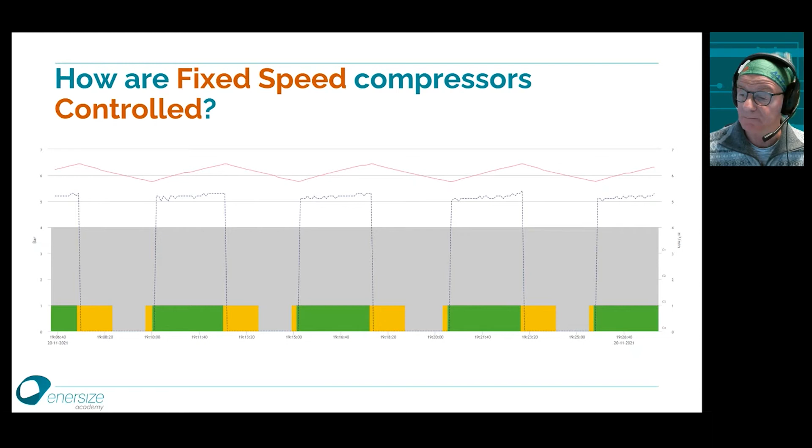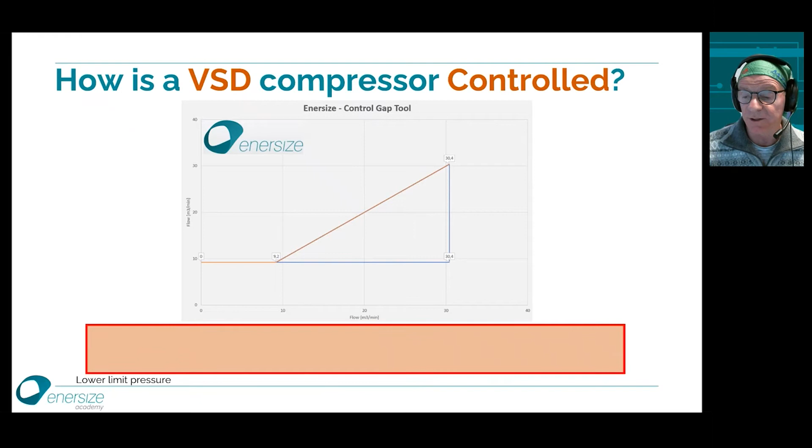That was fixed speed compressors. With the variable speed drive, VSD compressors, it is a little bit different, not much, but a little bit. We still have the lower limit pressure, or the load pressure, and then the unload or the upper limit pressure, and then we have something we call target pressure.

And as long as we are in the VSD mode, and VSD mode means for a VSD compressor typically from 100 and down to 30%, then it will try to stay on the target pressure and speed up and down according to the demand. When it reaches the 30%, then it will start to operate as an on-off compressor. And that is basically what creates the control gap problem or issue.

But that's the way it is with VSD compressors.

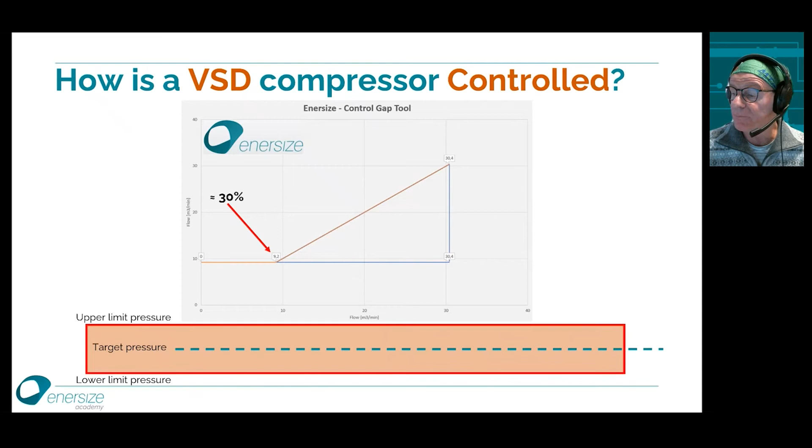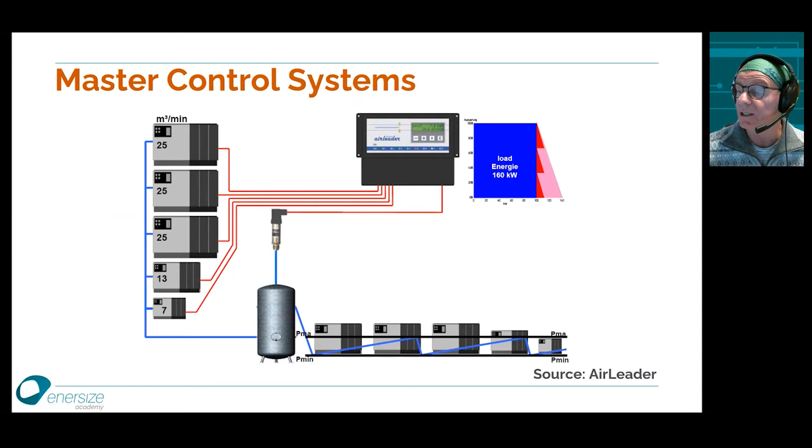But the master control will try to stay on the target. Now again, we are back in our X-Air cloud system. As you remember, red line bar, dotted line flow, green means running, yellow means unloaded, and gray means stopped.

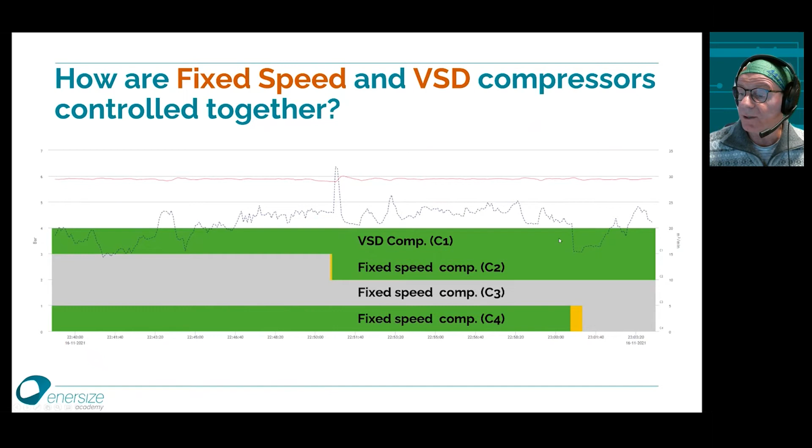You can see on top we have the VSD compressor. Remember, the VSD should preferably be always the first one in and the last compressor out, and this is also what happened here. We are running this VSD together with 3 fixed speed compressors on top of everything. The VSD will speed up and down according to the demand, and then we call in or send out fixed speed capacity accordingly.

So this is pretty much the way it should work, as shown here. Thank you.

Yeah, my topic for today is control gap when compressors fight. And I see this problem a lot. These days, variable speed drive compressors are quite popular, and they require some different settings and different sizing rules so that they work properly.

So in order to be efficient, VSD regulation over the complete range of compressors profile must be continuous, and the VSD should be operating nicely between its minimum and maximum settings. And if that's happening, then you'll have a really nice system that's efficient from 0 to 100% capacity, 100% capacity being the total combined capacity of your compressors.

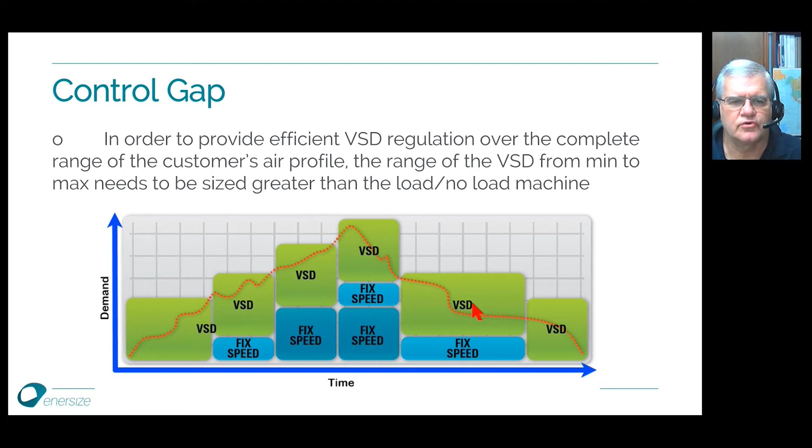And to achieve that, you need a little bit different compressor settings from what is normally seen in a multi-compressor system.

Now, a control gap happens when the variable speed drive compressor is not sized properly compared to fixed speed compressors. So the rule is that the variable part of the variable speed drive compressor must be equal to or larger than the fixed speed compressor with which the VSD must work.

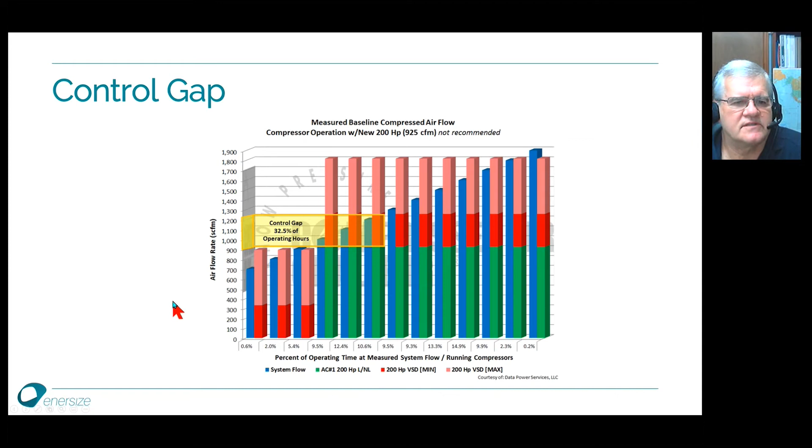Within these flows, here, here, and here we've got control gap issues. The rest of the time, the system is operating nicely, because the control gaps are actually in a band. Below the control gap, everything works nicely, and above the control gap, everything works nicely. If we had a third compressor come on, we would also have a control gap up here of the same width. So that's kind of my explanation of a control gap.

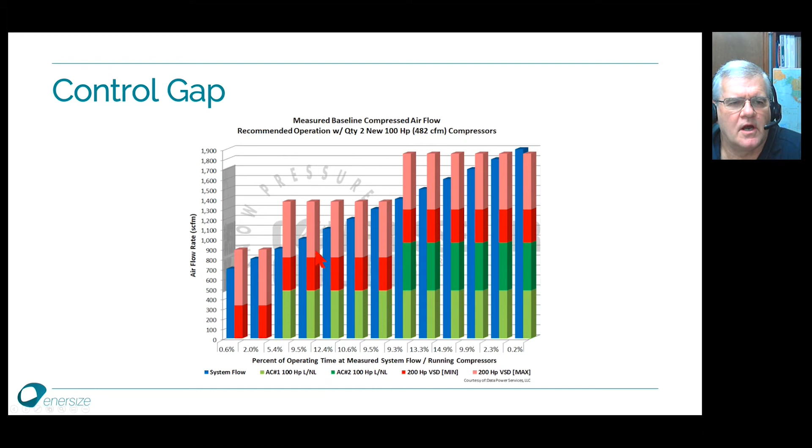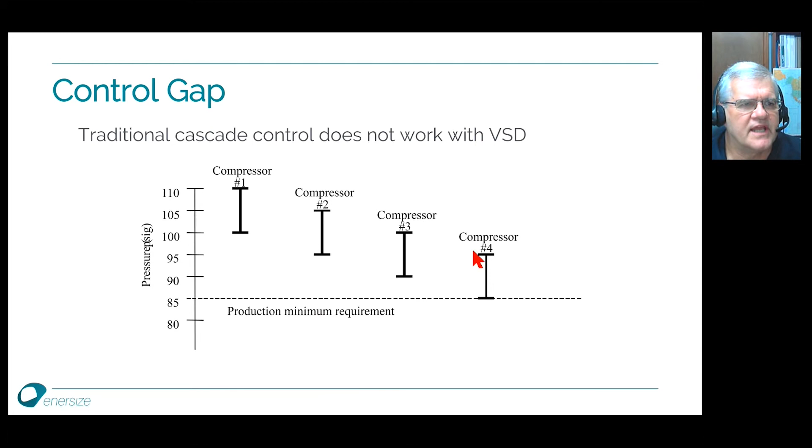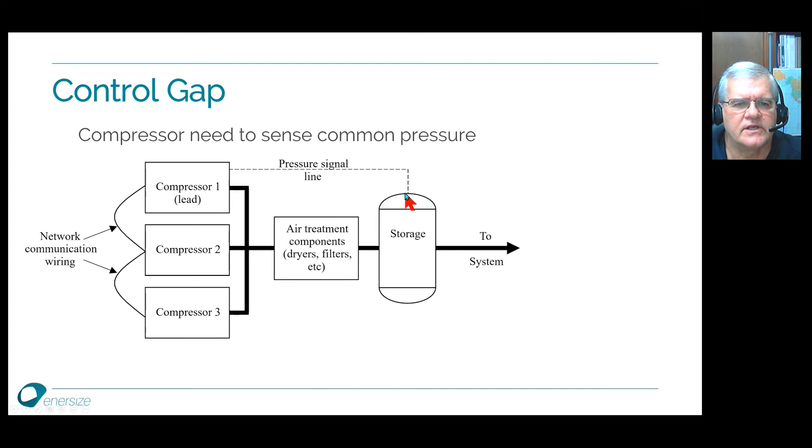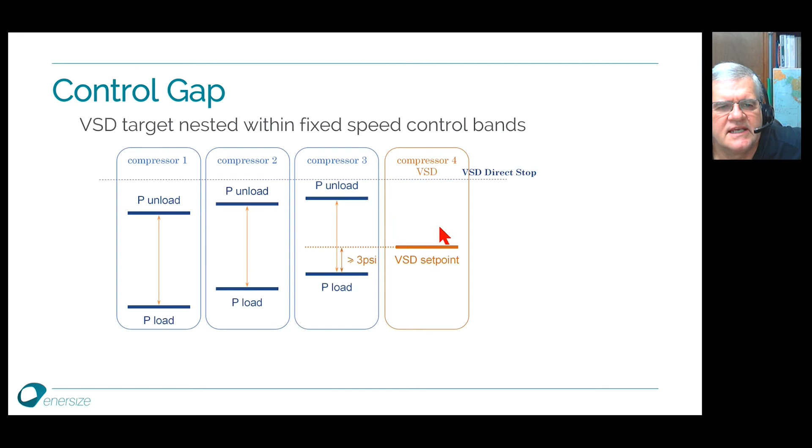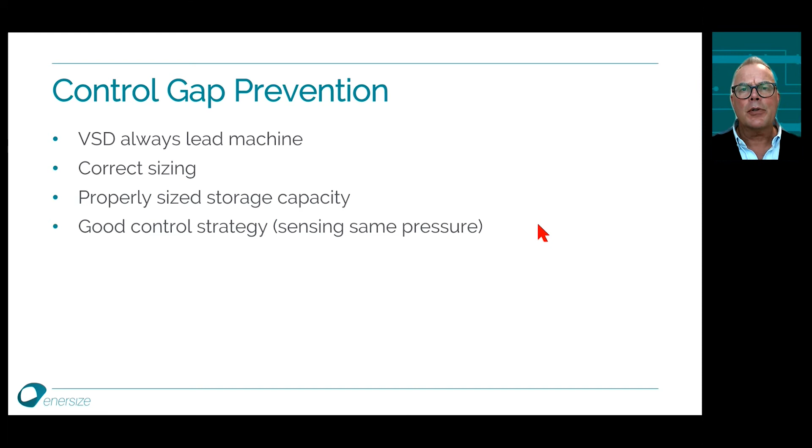Well, thank you very much, Ron, and we will continue to speak about compressors and about what happens when compressors fight. So it's great to have you here, Bo, and I'm looking forward to hear what you are presenting today. Screen is yours.

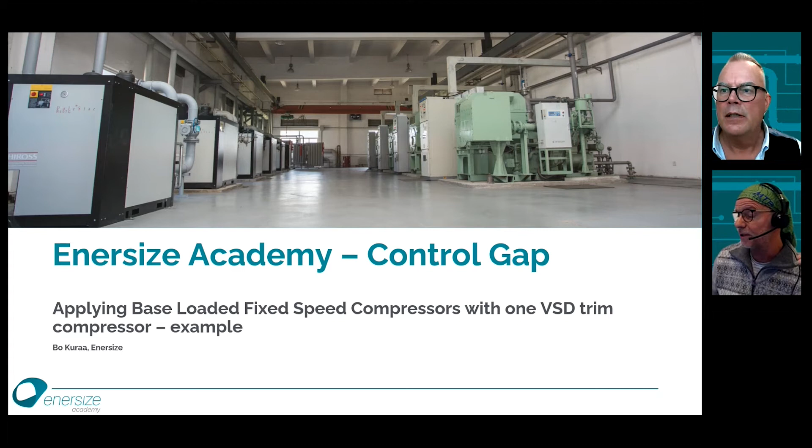Okay, thank you, Anders. I will talk a little bit about the control gap problematic or issues you can have. Let's take a look a little bit deeper into what it is.

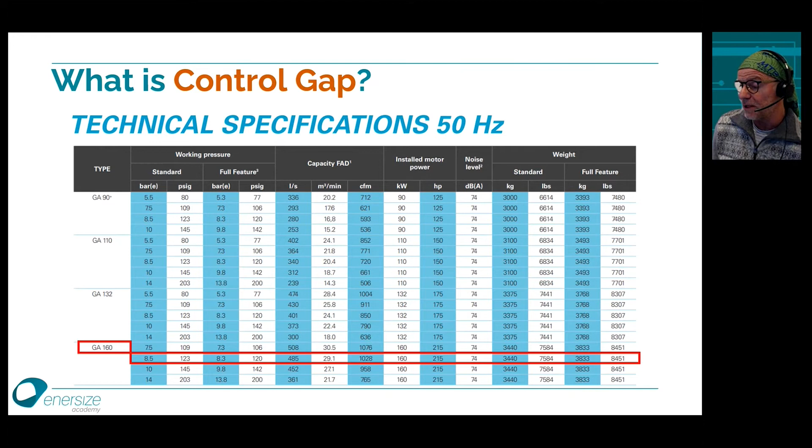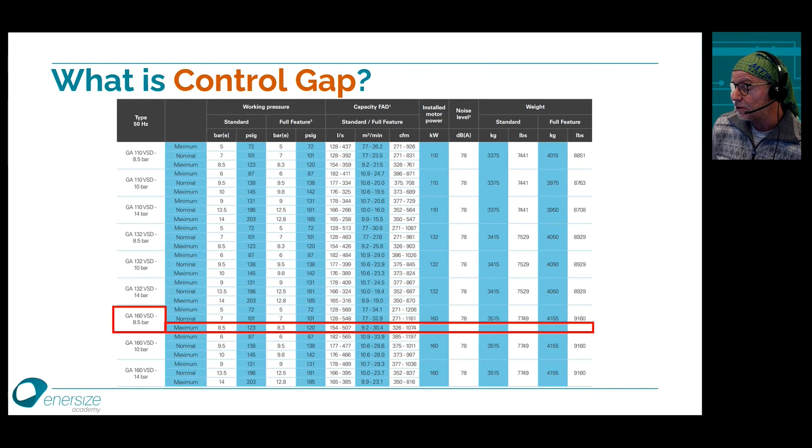If you take, for example, Atlas Copco, the GA oil-injected 160 kilowatt compressor, we go for an 8.5 bar machine. Then you will see that this one fixed speed compressor can deliver 29.1 meter cube per minute. We go into the similar data for GA 160 VSD. We have it here again, 8.5 bar. And if we look into this capacity according to free air delivery, FAD, then this compressor can go minimum 9.2 and up to 30.4.

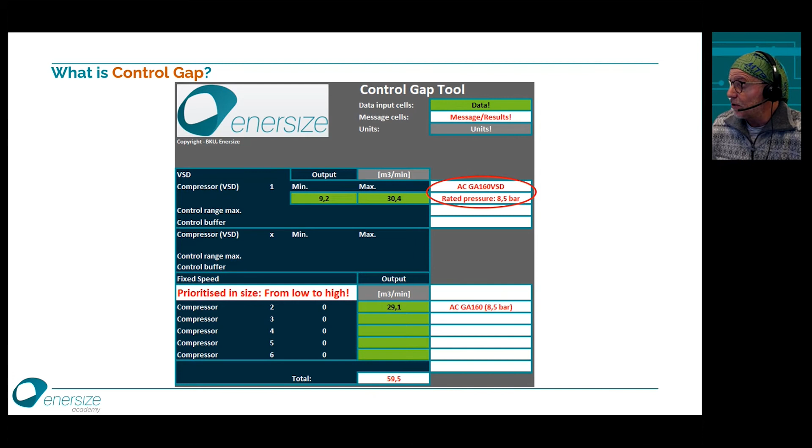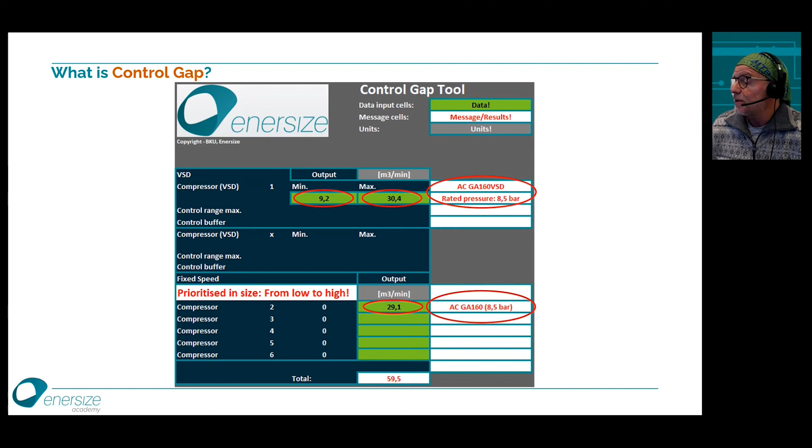If we try to put these numbers into our developed control gap tool, you can see I put the minimum output from the VSD at the top. We are again dealing with an Atlas Copco GA160 VSD. I put the 9.2 minimum and the maximum was 30.4, as you remember from the manual or the brochure. Then we have the other one, an ordinary oil-injected fixed-speed compressor, same size, or almost the same capacity, 29.1.

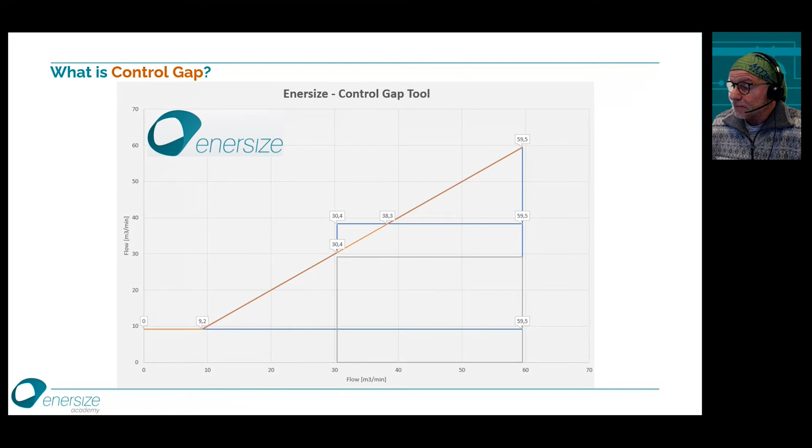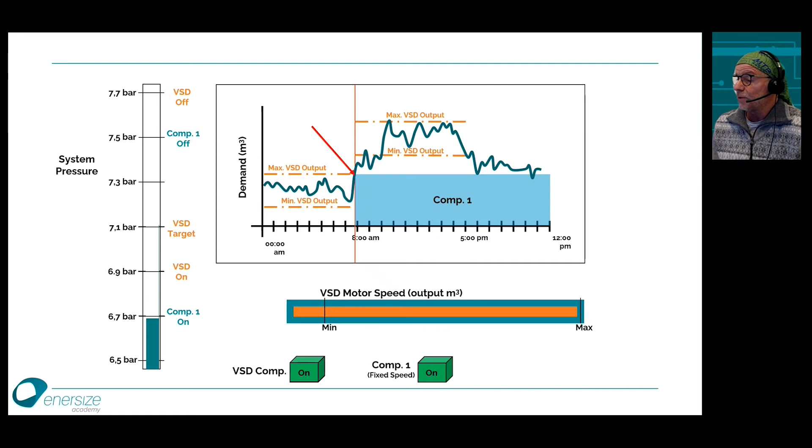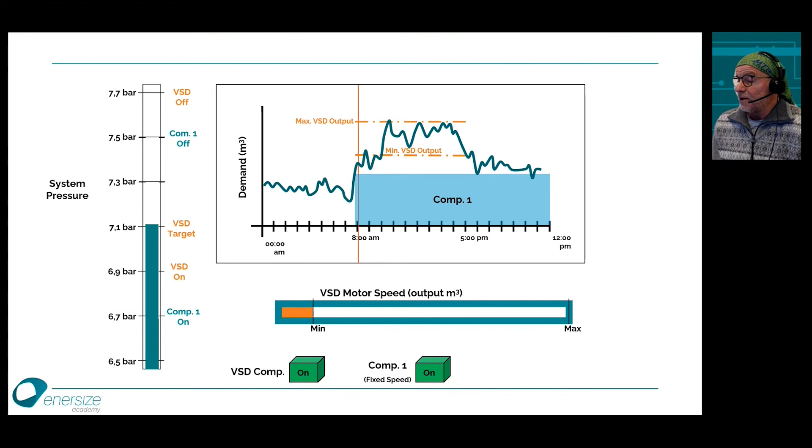You see the fixed speed compressor will go on, or actually first the VSD motor will go full speed trying to handle the situation, which is not enough. Compressor 1, similar size, will go on. And now, as you can see, we have too much air available, which will cause the pressure to increase.

You can see up to where we put the fixed speed compressor into unloaded condition. We are here at the minimum speed for the VSD. Next, we are in this area, as you can see, the control gap area, as we call it.

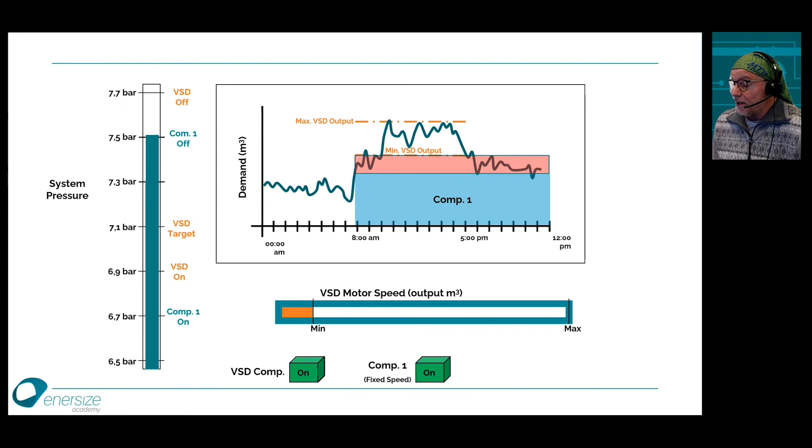The next thing that will happen is that compressor 1 will go off, or unloaded. And remember, unloaded means the fixed speed compressor will still continue to consume in the region of 25% energy, even though it doesn't contribute at all to the generation of compressed air.

We are now in a situation where we have the VSD minimum speed. The VSD is now all by itself again. It will try to speed up, but shortly after, compressor 1 will have to go on again because we simply have too little air available.

So that will happen next. We have seen that before. It goes on, we go on at the VSD target, and we are again at too high pressure. That will continue basically forever as long as we are in the control gap area. That was not the intention when you bought a VSD compressor in combination with a fixed speed compressor, that you will have basically a VSD compressor going on and off.

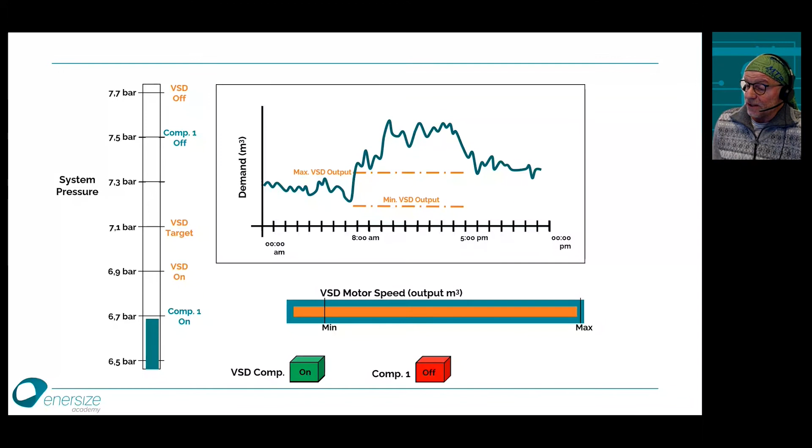Same with the fixed speed compressor. The fixed speed compressor will consume in unloaded condition 25% energy, and you will have a lot of pressure fluctuations. This is control gap in a nutshell. This is what we will get if we buy two similar sized compressors, VSD and fixed speed. And it doesn't really matter if we have more compressors. This was just an example.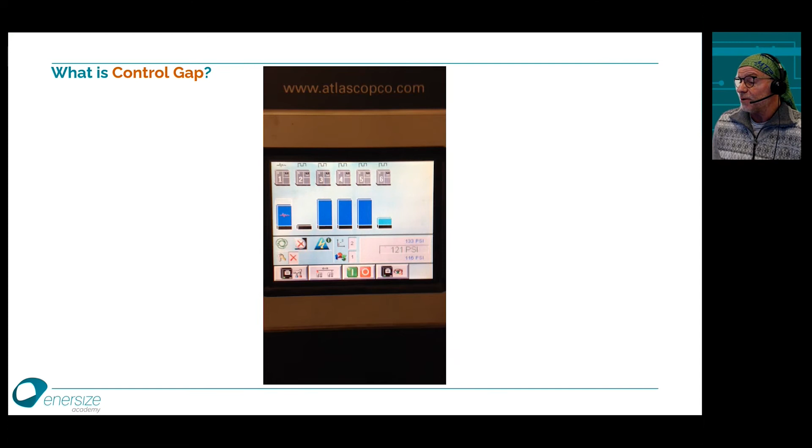Let's take a look at how it will look in real life. I will just show a little video about what it is.

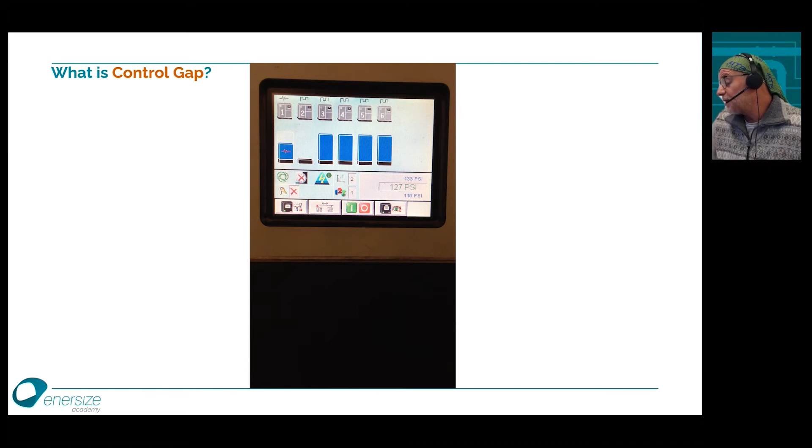As you can see, what you saw here was actually the first compressor was a VSD compressor, and you could see compressor number 6, which is a fixed speed compressor, going up and down from loaded to unloaded mode, and then consuming 25%. You can imagine that a compressor in the size of 400 kilowatt will still consume roughly 100 kilowatt to basically do nothing. Thank you.

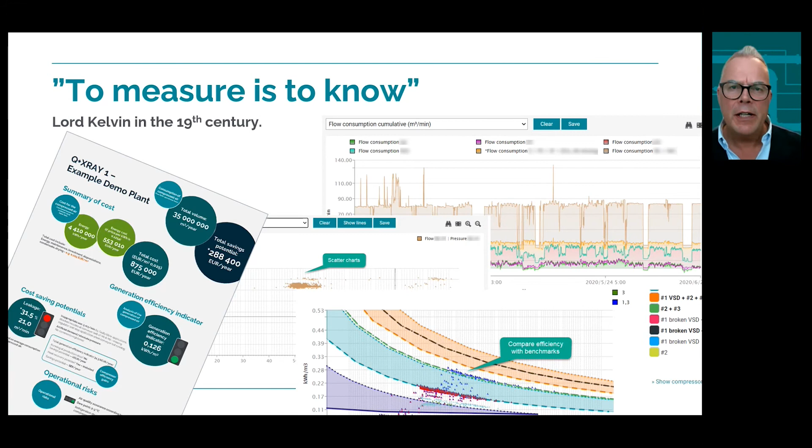Already in the 19th century, Lord Kelvin said, 'To measure is to know.' And this, you can say, is the fundament of everything we do at Enersize. In other words, we believe in data-driven decision making. And when we are helping customers with energy optimization of their compressed air, we always start by creating a baseline with what we call X-ray.

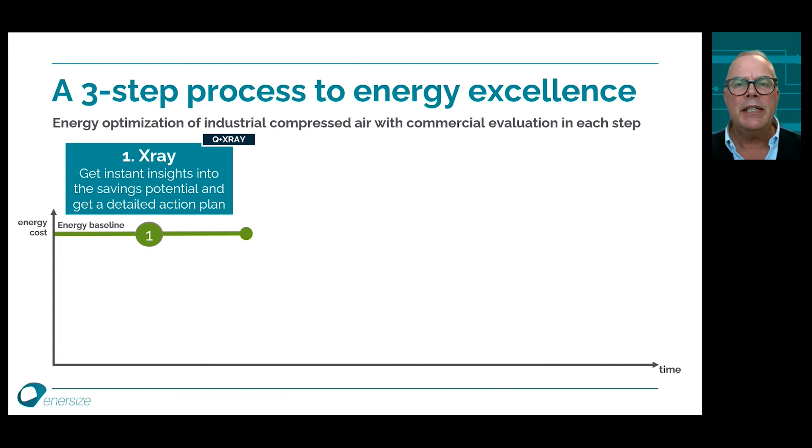We install mobile battery-driven loggers in the plant to measure pressure, current, voltage, dew point, etc. And we upload the data to our cloud database for analysis. With this, we are able, in a scientific way, to establish the initial energy baseline, defining the true energy cost level for running the compressed air system.

We are also able to present the savings potential and a detailed action plan on how to reach that. In the next step, we carry out a leakage survey and a repair project to reduce the waste. When the project is finished, we deliver a confirming system analysis, and once again we utilize the mobile loggers to get the scientific definition of the new energy cost level. We call this service, all in all, leakage reduction.

From this moment, we implement continuous monitoring in the plant to follow the compressed air system in real time, and to take data-driven decisions and help customers institute a sustainable energy optimization of their compressed air system. The ambition is to monitor and maintain the new energy cost level, or to reduce it even further. We call this latter step energy optimization.

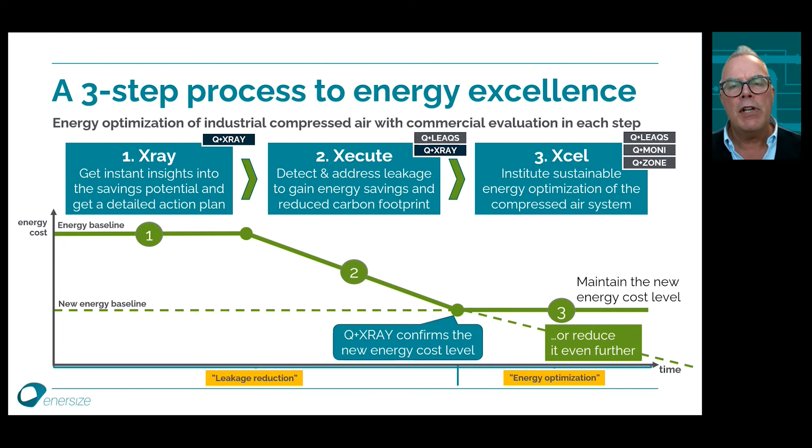And this is, I'm sorry to say, a never-ending story. We know one thing for sure, and that is that leaks will come back and new ones will occur as long as machines and human beings are in motion. The only way to keep a sustainable energy optimization and stay in control is to monitor and continuously act on deviations from the set target levels.

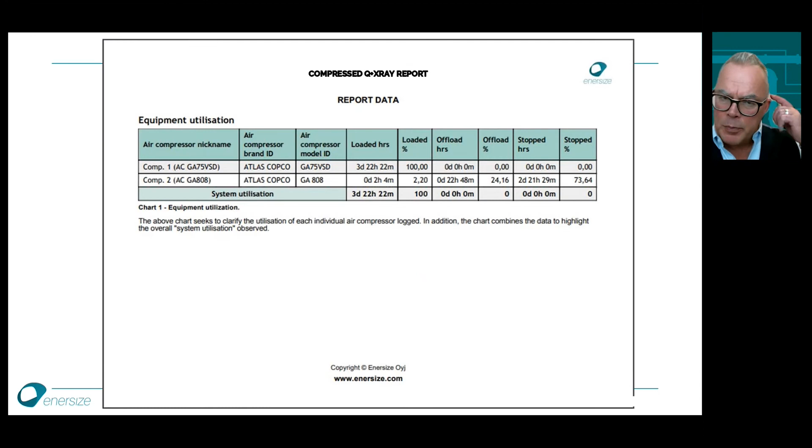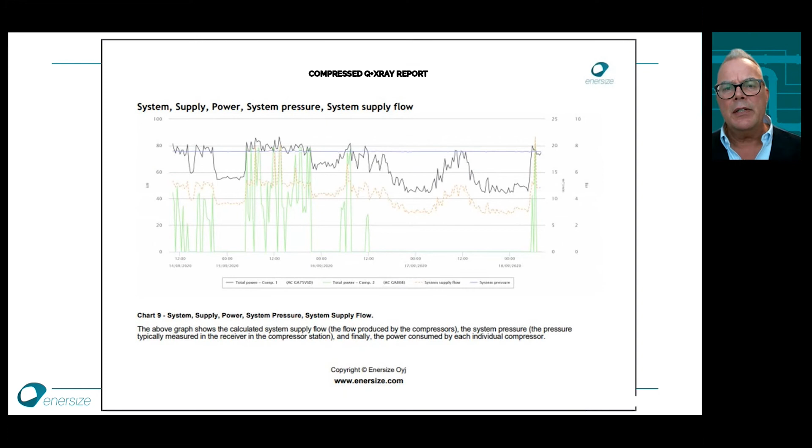When we present the initial report, we present a report that is very dense and filled with details. For most people, the level of detail is flying over their head. We realized this, so we decided to make an infographic that highlights the main KPIs, and now we present the report in an easy to consume way.

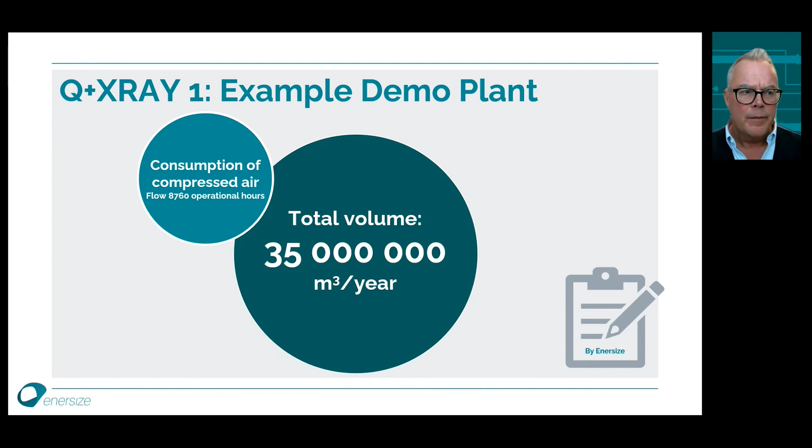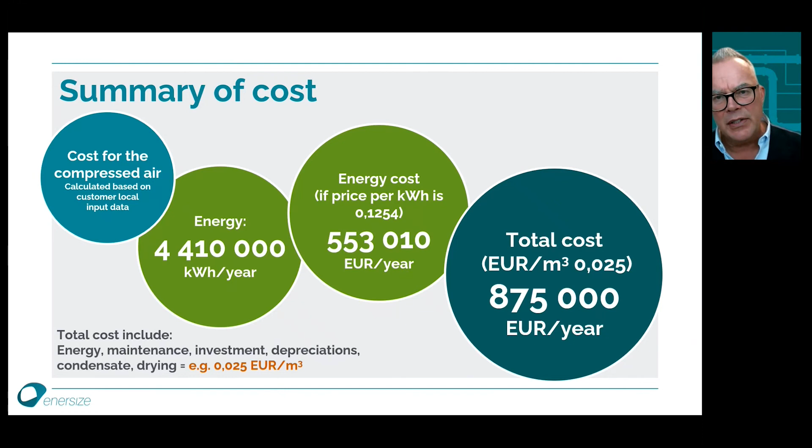We look at the operational hours, we look at the total volume, we look at the cost in different dimensions. So, for instance, how much energy is consumed? What is the energy cost to drive the compressed air system? What is the total cost of the compressed air system if you include investments in compressors, depreciations, condensate, handling of drying of the air, and maintenance, of course.

We're also looking at the generation efficiency indicator, which is a way of checking how much energy you need to generate a cubic meter of air. So, how efficient do the compressors work together?

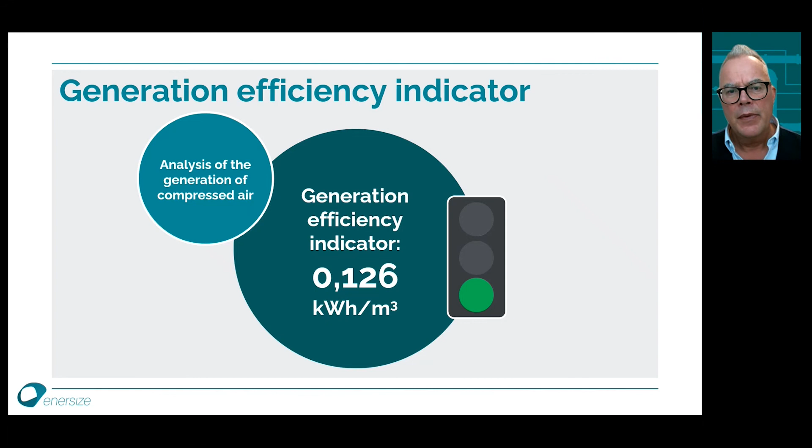And we are, of course, looking at the savings potential and looking into the leakage levels and whether that is on a good level or not. As said, this is all presented in an infographic that serves as a front page to the more detailed report.

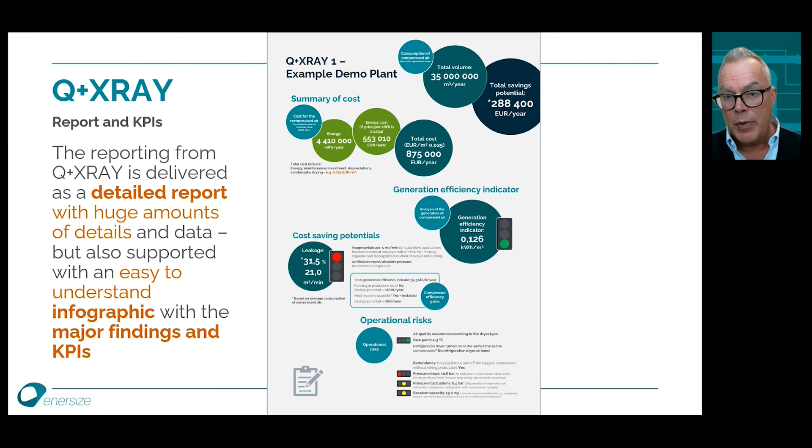In the following slides, I will talk about our new portal that R&D has developed, how it works, and how to become an early adopter to try it out. Our research and development team has increased, and we are now focusing the work into the creation of the second generation of compressor services for the release next year. But already now, in December, we have launched a lab version of a brand new portal for customers and partners.

The idea behind the portal is to improve the data collection process as part of our three-step process. As Anders explained before, the new portal is the first part of our X-ray process. The portal allows us to collect feedback from key customers and partners, and aims at streamlining the critical process when customers fill in information about their compressed air system. We realized that the collection of the data is a really complex process for different reasons, so our research and development team is now focusing their work into developing this portal. We want to provide a clear and user-friendly interface to make that part of the process efficient and as simple as possible.

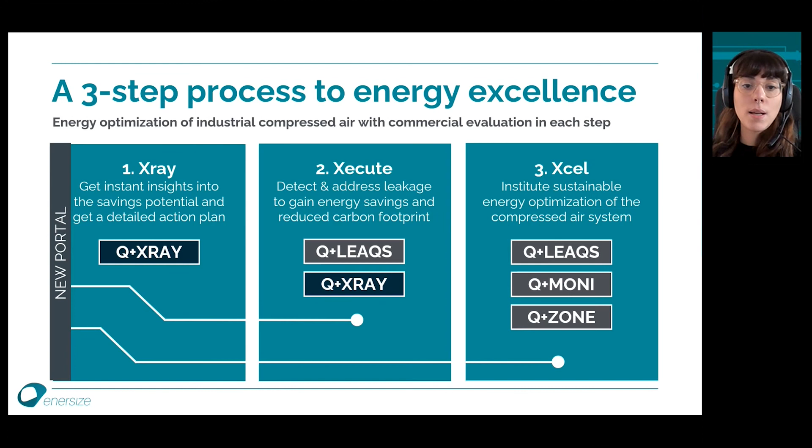With the portal, users can now find the different forms and add their data into our system. Once they have added and published the data, it will be reviewed by our experts. So, by using our portal, you as a user can get a better understanding of your compressor system through our feedback.

If we continue talking about users, we can also tell you that in our development team we have defined 3 different personas that will be our main users for this new portal: the customer technicians, the partner salesman, and our experts. The idea behind this is to let the portal tie together all our users, and we want to develop different interfaces regarding the user needs to ensure the best possible user experience.

So we are really happy to present our lab release of the new portal, and some of our goals with the release were to get alignment across the new R&D team.

This is the very first thing that Enersize does with the new R&D team. We also wanted to set an anchor point to measure the success of our launch functionalities.

The lab release is not a feature-complete release, but it reflects the software potentialities and provides a real environment for in-house testing, which is really important. Regarding the users, this lab release allows our clients and partners to get the look and feel and to test it out, and we are always open to receive feedback to improve the products.

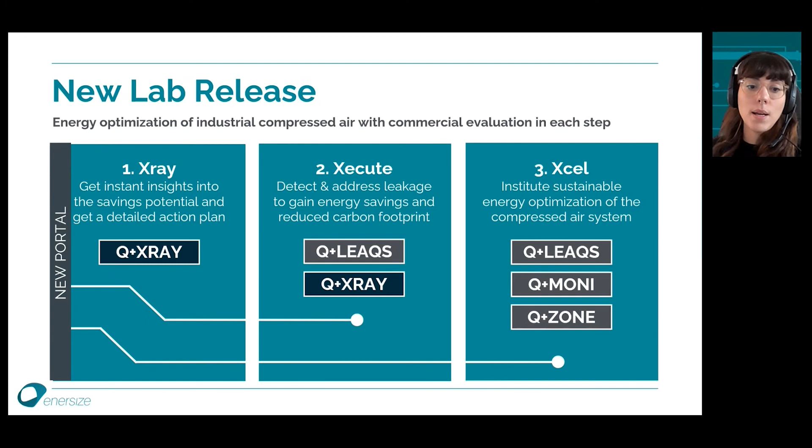Now we would like to give you a little tour in the portal. Here you can see how you can add your compressed air system with some of the properties that we think are important to understand how your system works.

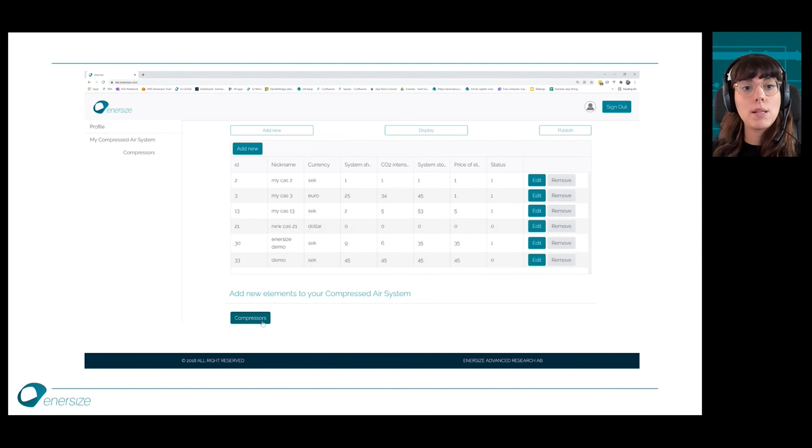Once you have added your compressor system, you can add, for example, compressors to your system. You can choose compressors that are in our catalog, so you can see our brands and models, or create new ones if we don't have them. And if you choose a model that we already have in our database, it will populate some of the data.

And this data is verified, so it makes all this process more easy, and it reduces the risk of making mistakes in this kind of properties that are really, really sensible.

In the future, we would like to increase the number of functionalities of this portal, like giving the user the possibility to add more elements like dryers and receivers to their own system. We will also allow our experts, as I said, to give feedback on the user data and guide them into understanding better their compressor system.

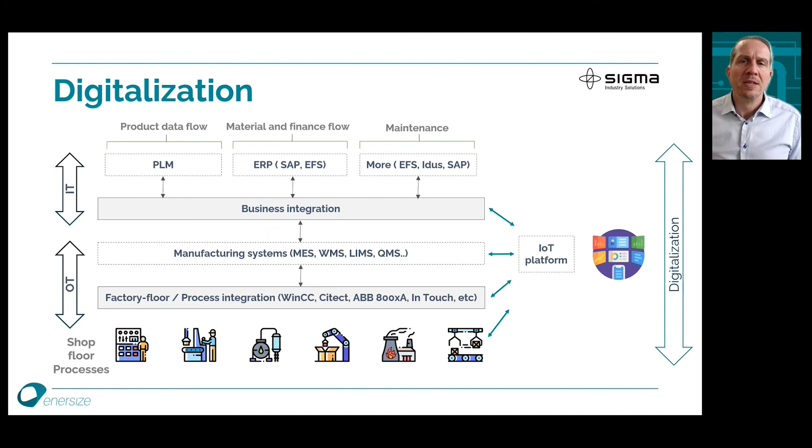At Enersize, we are tying together real-time data from the factory floor with the flexibility of information technology. This slide from our technology partner, Sigma Industry Solutions, shows us what we are dealing with. Interoperability from the factory floor, also called operational technology (OT), to information technology (IT), is for many a challenge. Until now, Enersize has had its own proprietary solutions for acquiring and managing real-time data.

We have identified a set of themes to guide Enersize investments. In my presentation today, I will focus on the theme of open standards, because it directly influences your possibilities to integrate compressed air services into your digitalization platforms.

At Enersize, we are in the process of changing the way we work to deliver better quality, using open standards to lower the investment for you while increasing the flexibility, and streamlining the process of implementing permanent monitoring of your compressed air. Therefore, we are doing two major changes in how we work.

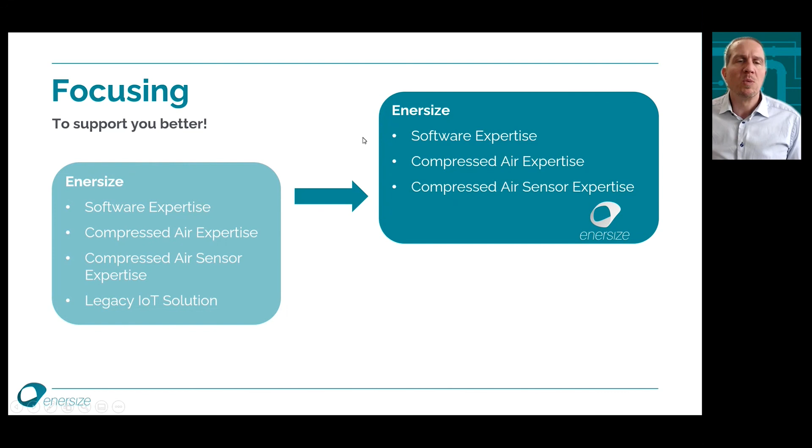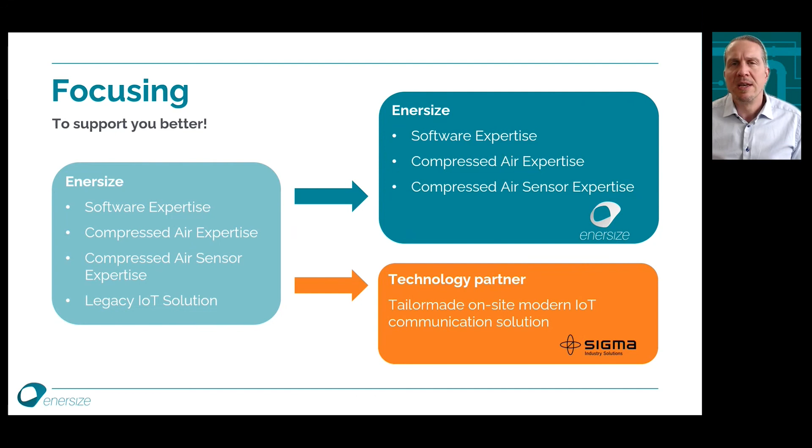First, we are focusing our business even more. We continue, of course, to deliver energy efficiency to compressed air systems, but we also outsource to experts on real-time data collection on the OT side. Sigma Industry Solutions, who is part of the Sigma Group with 5,000 employees in 13 countries, is an ideal technology partner to Enersize.

Second, with the help from Sigma Industry Solutions, we are standardizing the basic setup of monitoring equipment. At Enersize, we are experts at sensing compressed air: how to select the proper flow meter, how to configure it, how to install a dew point sensor, etc.

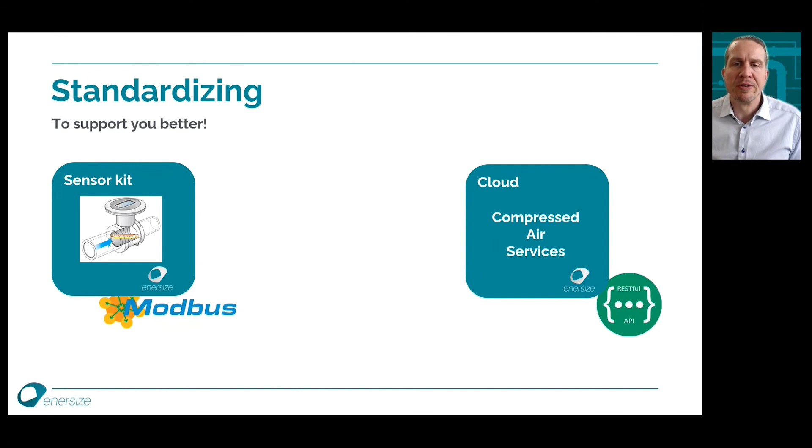We are also developing our compressed air services in the cloud, aiming to become the global leader in software for energy efficiency of compressed air. Sigma is implementing communication solutions, including IoT, and together we can deliver a plug-and-play solution for compressed air monitoring, using open standards such as Modbus, MQTT, and RESTful APIs, to maintain interoperability.

We are still in the pilot phase and looking for early adopters. So if you feel that you're ready to start optimizing your compressed air system using our end-to-end solution, be sure to let us know. Thank you very much for listening.

Thank you very much for this update, Rebecca and Anders. It is exciting to see what is being built, and also to understand how important Enersize sees the engagement from customers and partners in the development work.

I will now look at some tools and activities available to increase interest for energy optimization of compressed air. The first area I want to highlight is the Enersize web. This is a great resource for learning, and my favorite area is the Enersize Bootcamp.

Here you can learn about compressed air, and when you feel ready, you can take a quiz to test your skills. And talking about skills, I now want to hand over to Johannes Olsson, who is heading up Enersize Academy. So please bring it on, Johannes.

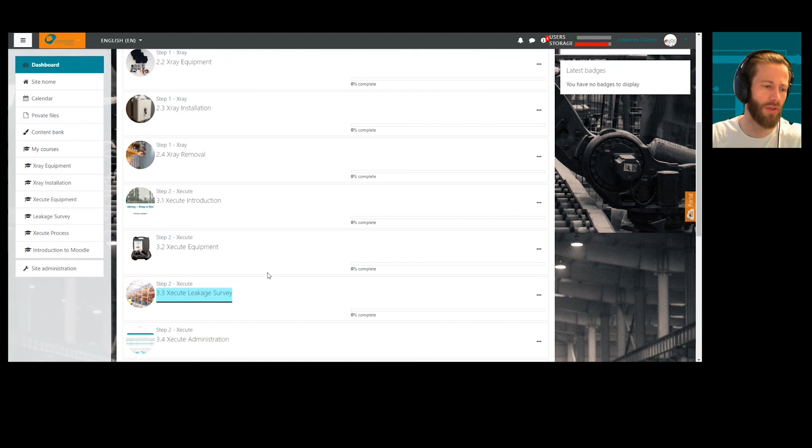After the student is enrolled, they are presented with a dashboard, the home screen, where they see all the required courses and exams. Let's take a look. We click on a course and we are presented with all the lessons in this course. We can take the safety check.

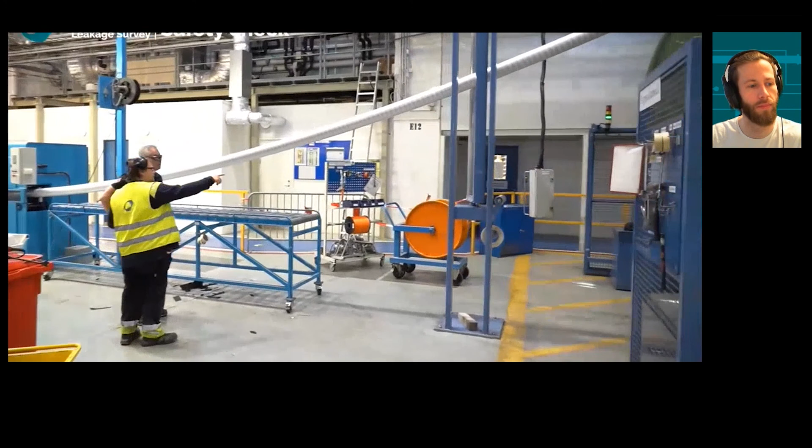Here we will come to a video lesson. Make sure to always keep regular contact with the local staff to keep you updated on factory events, when equipment is turned on and off, and other needed safety measures.

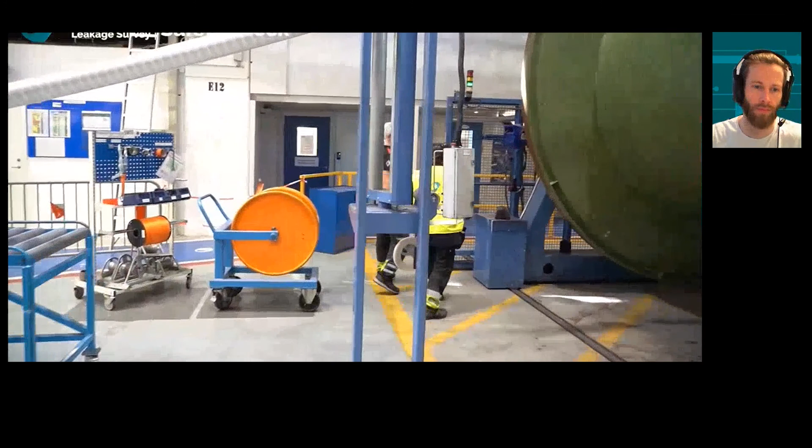When there is moving machinery, take special care and ask when it's safe to enter the area to do the survey.

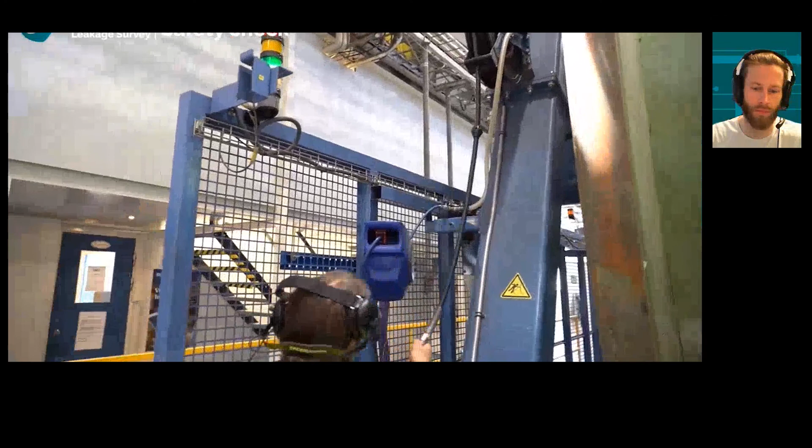And that's it for me. Thank you. Thank you, Johannes. That was really great stuff.

Last time we talked about the Enersize Advisory Council. We have now run our first physical meeting with international experts and representatives from the industry to guide us as we develop. From the discussion, we could see that sustainability topics are now top of the agenda in all companies: real projects, ambitious objectives, and transparent follow-up. We also heard that the European Green Deal is making an impact, together with other initiatives like the Agenda 2030 and the recent COP26.

Interesting is that production in low-cost countries is less attractive, as the carbon footprint for running the operation is often higher, and customers are asking for the life cycle impact when buying products. This is moving production into new countries.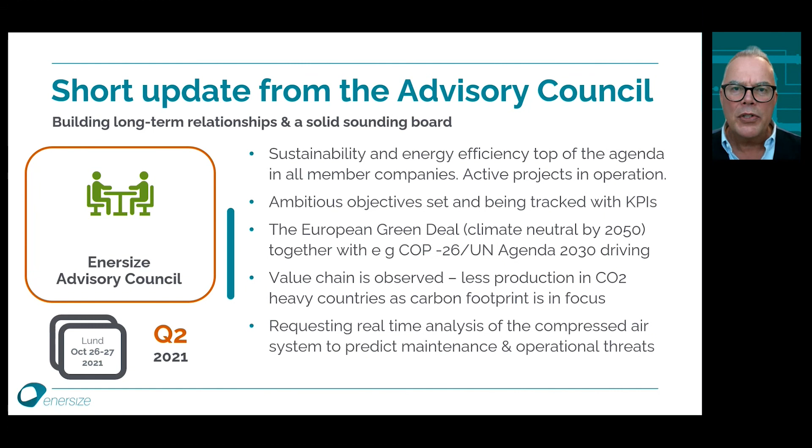We also learned that there is a need for someone to take on the task of doing real-time analysis of the compressed air system to predict maintenance and predict operational threats. What a great task for Enersize. So more about that later.